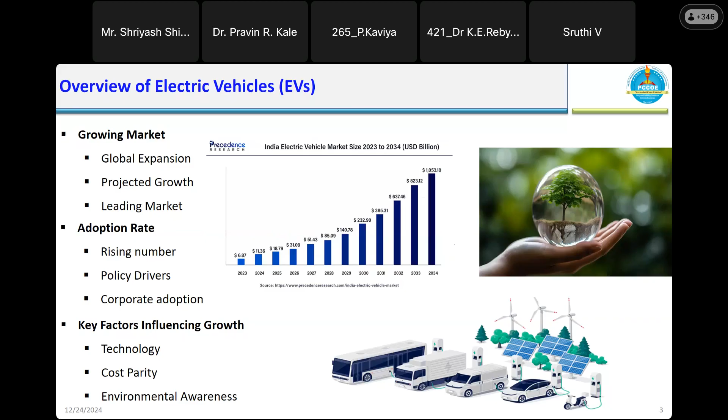Then what are the challenges? Limited charging infrastructure - the infrastructure is still very less. The charging stations are very few, and there is limited charging infrastructure in developing regions also. Then high initial cost is also one of the important parameters. Then raw material sourcing for batteries is also one of the important challenges.

These are the challenges in the electric vehicle. Then, of course, there are opportunities. The opportunities include renewable energy integration with electric vehicle charging networks - you can use solar energy. Then battery recycling and second life applications - battery recycling, where you can recycle the battery and give it a second life. This is also an area where you can work on opportunities.

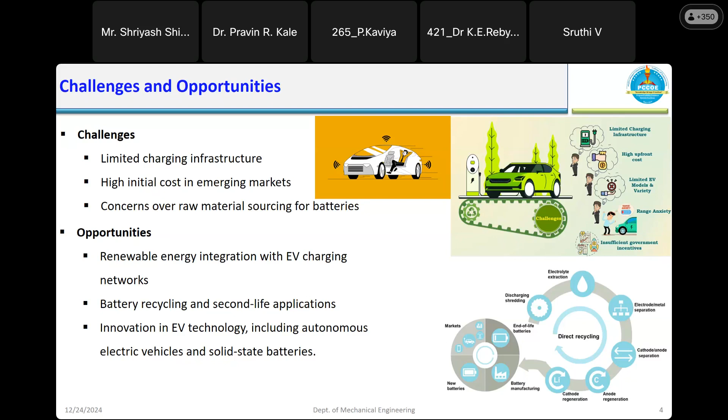Then innovations in electric vehicle technology. Here it is always open - the technology is always open, which includes autonomous electric vehicles and solid state batteries. Now solid state batteries are being introduced. The lithium ion batteries are being replaced by these solid state batteries.

Now, before going further, in overview, what are the different electric vehicles? One is the purely electric vehicle, battery electric vehicle, also known as all-electric vehicle. It is purely electric, entirely on a battery powered electric drivetrain. A large battery pack plugging into the electricity grid is required. The battery pack provides power to one or more electric motors - you can use one motor for front wheel drive or two motors for both front and rear, depending on what you are using. Even four wheel drive is possible.

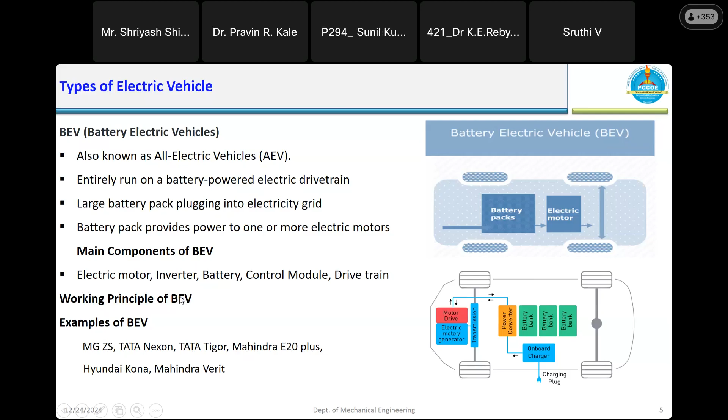Then the main components are: of course the electric motor is there, which is a very important component. Then inverter, AC/DC converter, battery, and control module - since you're using a battery, everything is electronics and it's easily possible. The control units, electronic control units are there. Then the drivetrain - the drivetrain is the main focus area for this particular session. Then the working principle, and these are different examples.

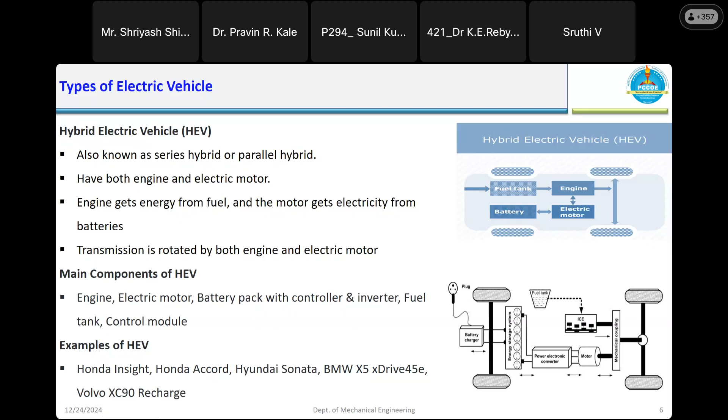Then the hybrid electric vehicle. Second is the hybrid electric vehicle, in which you can use both the conventional IC engine and the electric motor. In a hybrid electric vehicle, this electric motor is essential along with the engine. Gasoline or any type of fuel can be used. That is the hybrid electric vehicle. The engine gets energized from fuel and the motor gets electricity from the batteries. The main components of this hybrid electric vehicle are: engine, electric motor, battery pack with controllers, inverter, fuel tank, and the control module. Control unit module is everywhere. These are examples of hybrid electric vehicles.

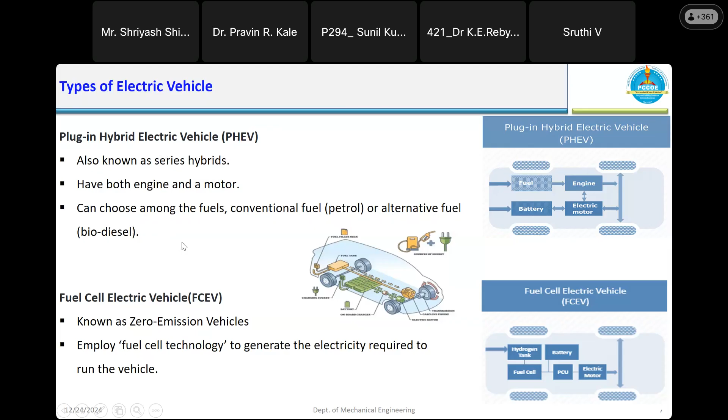Then plug-in hybrid electric vehicle, now also known as a series hybrid. It particularly is a series hybrid and has both engine and motor. Again, it has both, but most of the time the vehicle runs by electric motor, and therefore this plug-in hybrid electric vehicle is used. You can choose among fuels - conventional fuel like petrol, or alternative fuel. Biodiesel is also applicable or used for this plug-in.

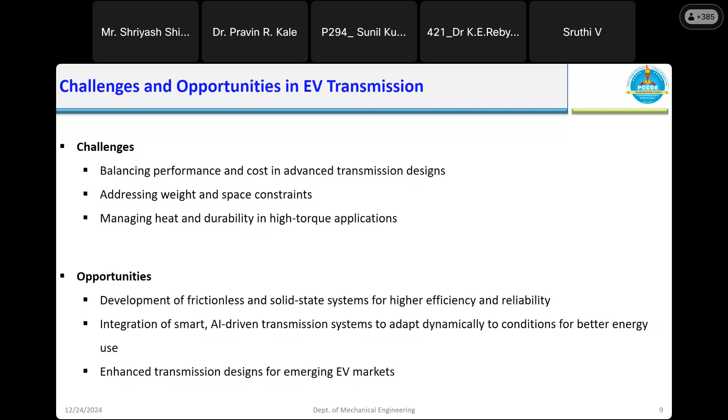Then integration of smart and AI driven transmission systems. The transmission system is now driven by AI, or there is integration of smart transmission systems. That is also important. Then enhanced transmission design for the emerging EV market. So these are the opportunities where you can work.

Now, what is a transmission system? A transmission system is a crucial component of the drivetrain, responsible for transferring power from engine or motor to wheels. You have to transmit the power from engine to motor, or electric motor to wheel.

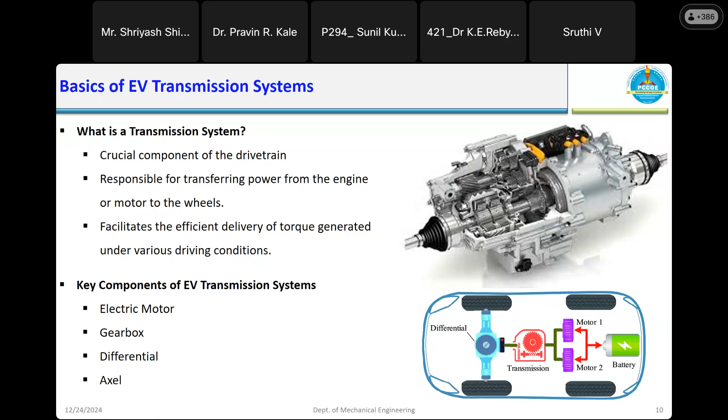So this is the transmission system. You require the transmission system, which consists of different gears. These are the different parts: electric motor is one of the components of the transmission unit, then gearbox, differential, and axle. So these are the different components of transmission system.

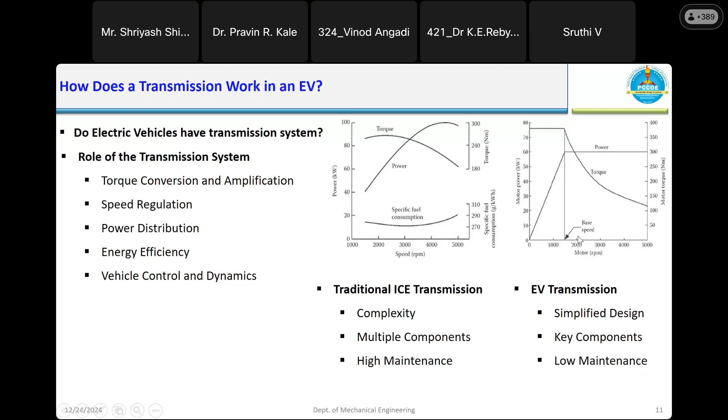Now this is the basic difference: power source is internal combustion engine versus electric motor. For gears, a multi-speed gearbox with typically 5 to 10 speeds is used for IC engines, whereas a single speed gearbox is sufficient for EVs, or in some cases a 2-speed gearbox. Up to today, maximum 2-speed multi-speed gearbox is used in electric vehicle transmission systems, but normally in most cases it is a single speed gearbox.

Then torque delivery requires gears to amplify torque at low RPM in IC engines, so this is essential there. In case of electric motor, there is instant torque, so you can suddenly increase the speed of the vehicle and accelerate easily, reducing the need for a gearbox.

Then a clutch or torque converter is used to disengage the engine, because you require engagement and disengagement, so you have to use a clutch for idling and gear shifting. But in case of EVs, this is not required due to the linear power delivery of the electric motor.

Then the shifting mechanism is manual or automatic in IC engines, whereas it is automatic and seamless in case of electric vehicles.

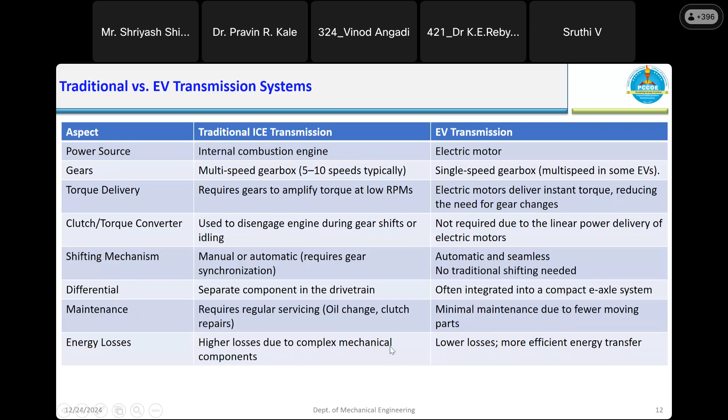For maintenance, this requires regular servicing and clutch repairing, but maintenance is comparatively less because there are no moving parts or lesser moving parts. As for energy losses, there are higher losses due to complex mechanical components, so efficiency is lower.

Now these are the functional advantages of the EV transmission system. First, efficiency: higher efficiency as it eliminates energy losses. Then performance: instant torque from the electric motor provides smooth acceleration without the need for gear shifts, so performance is also important. Then compactness: reduced space and weight compared to bulky transmission systems in IC engine vehicles. And durability: less wear and longer lasting components.

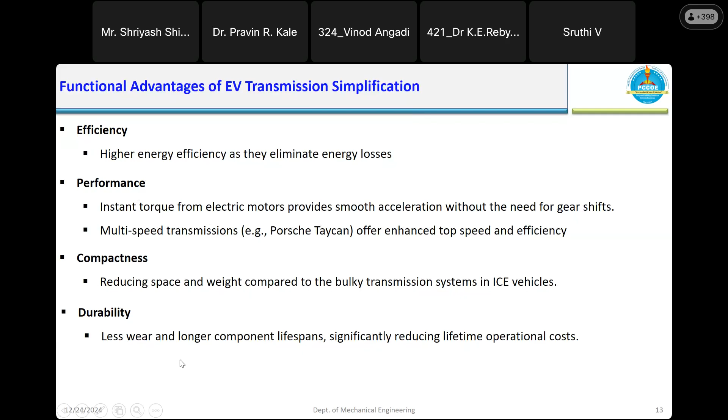Now, different types of electric vehicle transmission systems, particularly single speed. In single speed...

Am I audible now? Is it clear now? Yes sir, yes sir, you're audible.

Now, this is single speed transmission, the most common transmission in electric vehicles, which is commonly used, with only one reduction ratio. Normally it is 2, 3, 4, 5, 6 maximum, so less than 6. Then it relies on the unique characteristics of the electric motor.

This is the key feature, the unique characteristics of the electric motor. It is ideal for most driving scenarios due to the broad torque range of electric motors. In most cases, this single speed transmission system is used, and most EVs feature a single speed reduction gear, simplifying the drivetrain and reducing maintenance needs.

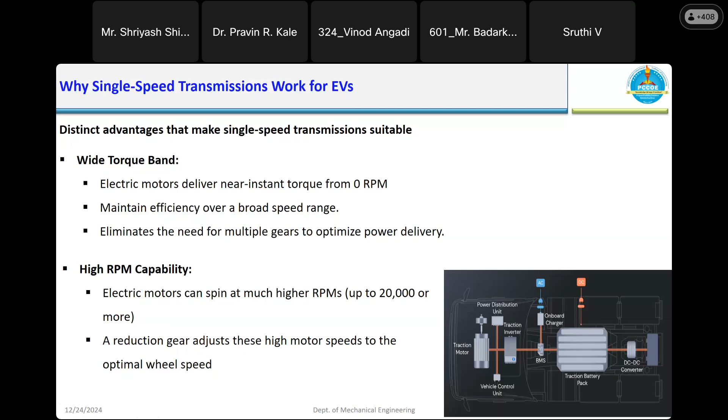Then simplicity of single speed transmission: fewer components, no clutch, torque converter or complex parts. Reduced complexity leads to fewer points of failure. This simplicity reduces complexity, cost and weight, with fewer components resulting in a simple design.

Then compact design: single speed systems are often integrated with the electric motor and differential into a single unit, which I will cover in the case study. This reduces the overall size and weight of the drivetrain. Reliability, because of fewer moving parts, results in a longer lifespan and lower maintenance requirements.

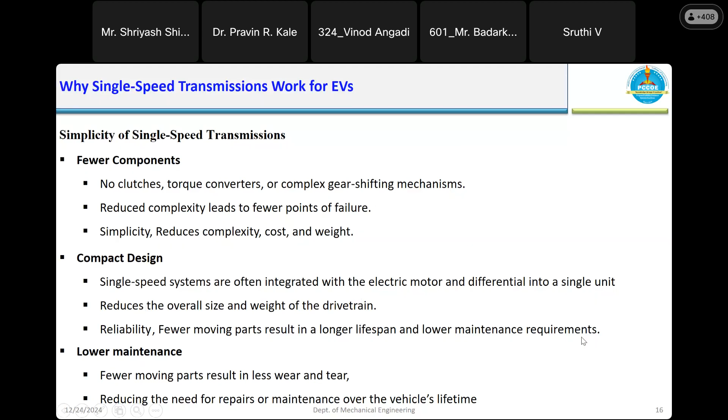Then efficiency of single speed transmission: energy loss reduction through streamlined power delivery, which is very important and improves the range.

Then limitations of single speed transmission: it has high speed efficiency limits and is not suitable for heavy duty applications. You cannot use it for trucks or tractors, so it is not used in very high duty, heavy duty applications. So these are the examples of single speed transmission.

Multi-speed transmission improves potential for enhanced performance, offering advantages in efficiency and adaptability. There are challenges in implementation; it is very difficult to use, but the maximum you can use is up to 2-stage or 2-speed multi-speed transmission system.

Performance benefits include improved efficiency through optimal motor operation. Electric motors are most efficient within a specific range, so multi-speed transmission allows the motor to stay within this range, enhancing optimal power.

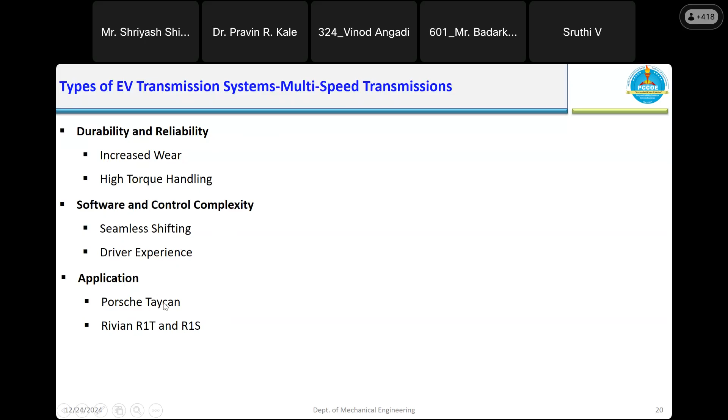Applications include the Porsche Taycan. Then there's the direct drive system: here, the engine or motor is connected directly to the axle or wheel, without a gear drive or any transmission system, transmitting power directly to the wheels.

The motor directly drives the output shaft, eliminating the need for a gearbox. You can remove the clutch and other complex transmission mechanisms. This is rarely found in electric vehicles, but it's commonly found in wind turbines and industrial machinery.

The benefits of a direct drive system are simplified design, improved efficiency, and reduced noise and vibration due to fewer components. It's also compact and lightweight, with low maintenance cost and enhanced performance.

Limitations of the direct drive system include high cost, since advanced materials and manufacturing techniques are required, which increases cost.

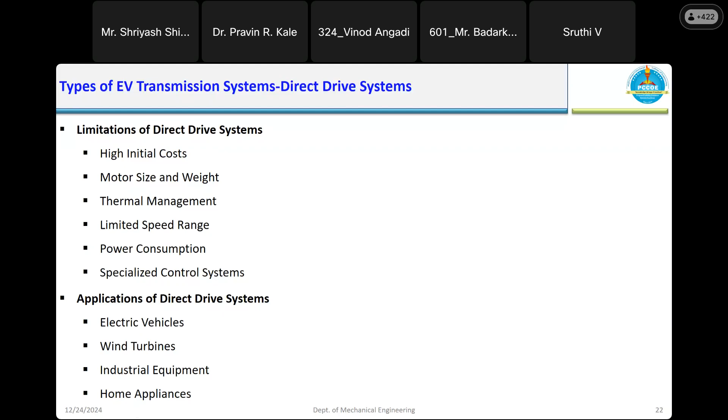And therefore power consumption requires a more specialized control system, because you are directly driving the system or wheel axle. So these are the advantages and limitations of the direct drive system. Applications in electric vehicles are rare but it is commonly used in wind turbines, industrial equipment, and home appliances, especially washing machines.

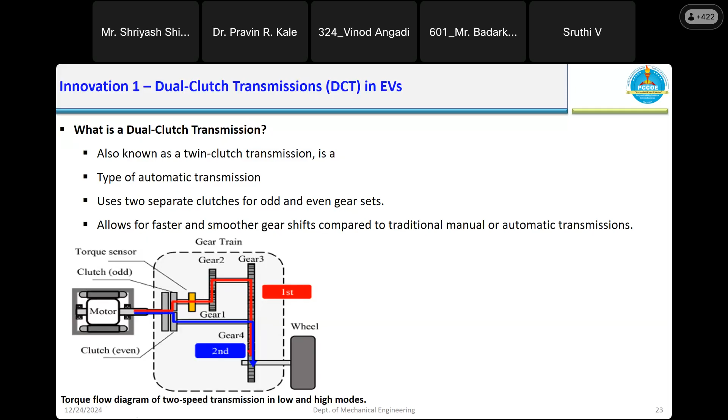The next innovation is the dual clutch transmission, also called twin clutch transmission. It is a type of automatic transmission that uses two separate clutches for odd and even gear sets, allowing faster and smoother gear shifts compared to traditional manual transmission. Here I have shown the torque flow diagram where the two clutch systems can be used. This is also one of the important areas where you can work.

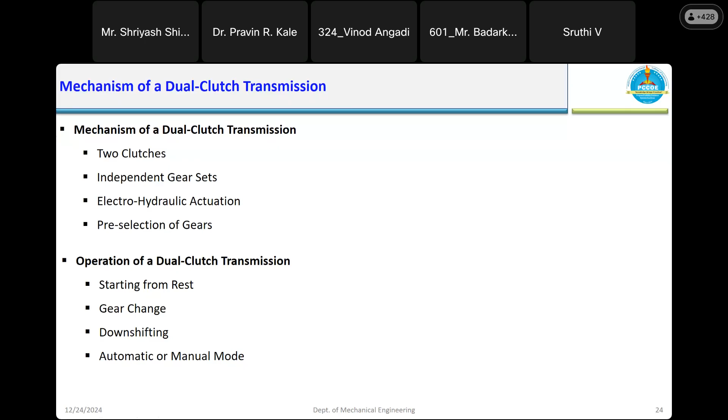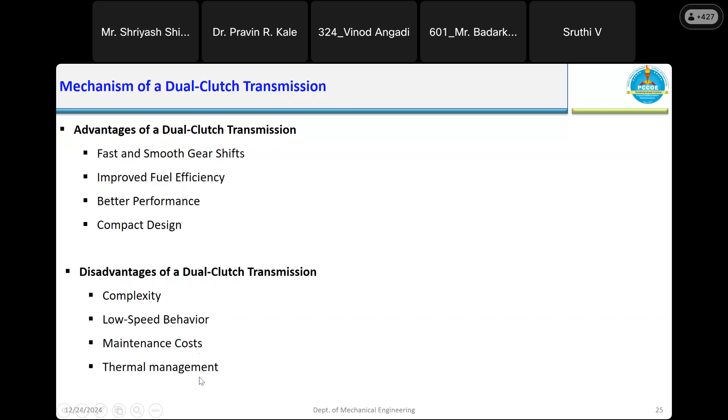Advantages include fast and smooth gear shifts, because there is no time lag or jerks. Fuel efficiency is improved, along with better performance and compact design. The disadvantages of dual clutch transmission are complexity, because there are two clutches to handle, low speed behavior issues, higher maintenance cost, and the need for more thermal management.

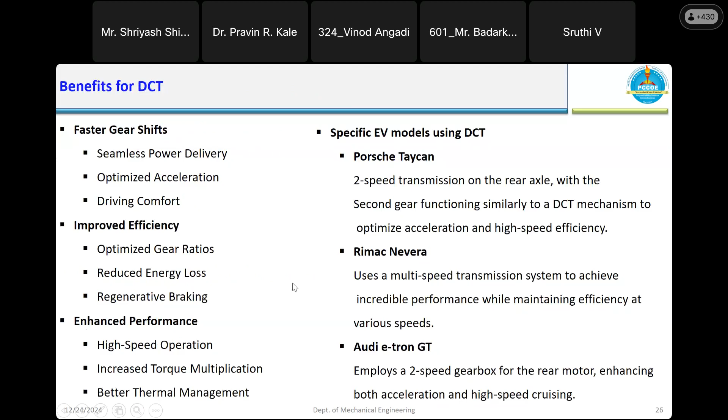The benefits are faster gear shifts, improved efficiency, and enhanced performance. Performance is also increased. These are the applications of electric vehicle models using DCT.

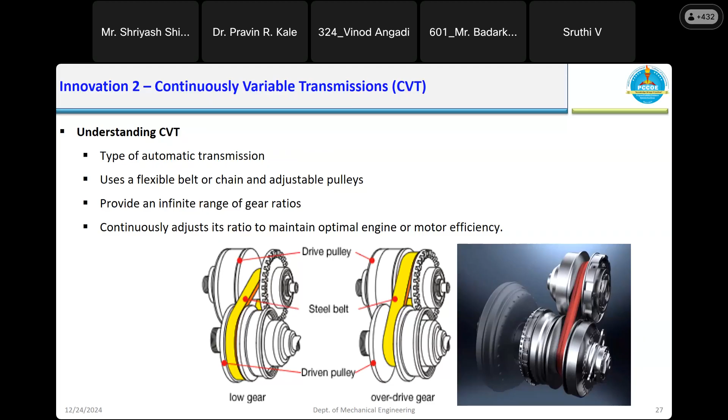CVT provides an infinite range, which is the main advantage. It continuously adjusts its ratio to maintain optimal engine or motor efficiency, and optimal performance can be obtained using this continuously variable transmission. It provides an infinite number of gear ratios within its range, allowing smooth and optimal performance.

The mechanical design uses a belt or chain between two adjustable conical pulleys, altering their diameters to change the gear ratio. Shifting of gears is not required, providing a seamless driving experience. It continuously adjusts to maintain the most efficient ratio, providing fuel or energy efficiency.

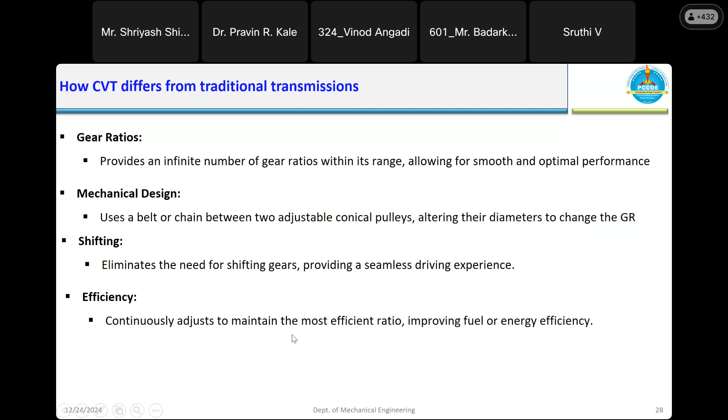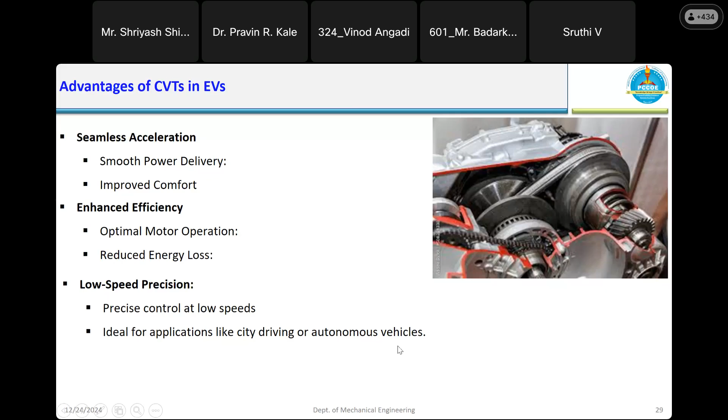The future aspects include material advancement, which is very important because of the development of more desirable, durable and efficient materials for belts and chains. This is an area where you can work.

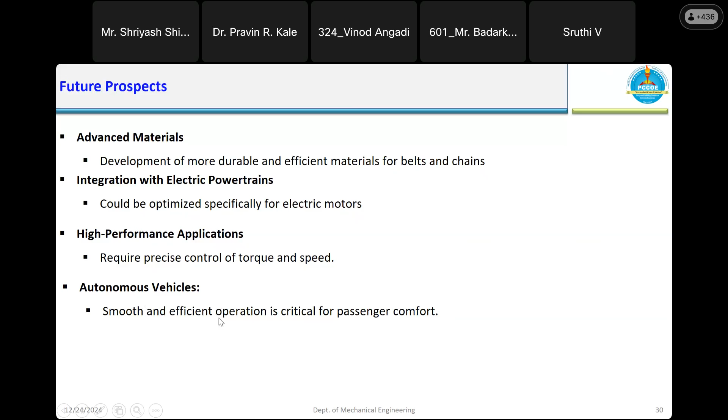Then integration with electric powertrain. Integration means you have to integrate all the elements or components. High performance applications require precise control of torque and speed, and autonomous vehicles require smooth and efficient operation.

Then integrated transmission and drivetrain system. What is the concept of integrated transmission and drivetrain system? It is combining transmissions with other drivetrain components, that means electric motors, inverters and differentials are combined into a single compact unit, making it an integrated transmission and drivetrain system.

So all components are combined in a single unit, including the axle and the wheels, and therefore the total space is reduced and the weight is also comparatively less, but it is a complicated design requiring electronics, controllers, etc.

This will simplify the drivetrain architecture, enhance performance and improve efficiency. This is an important area where you can work, combining transmission with other drivetrain components like the transmission system and electric motor.

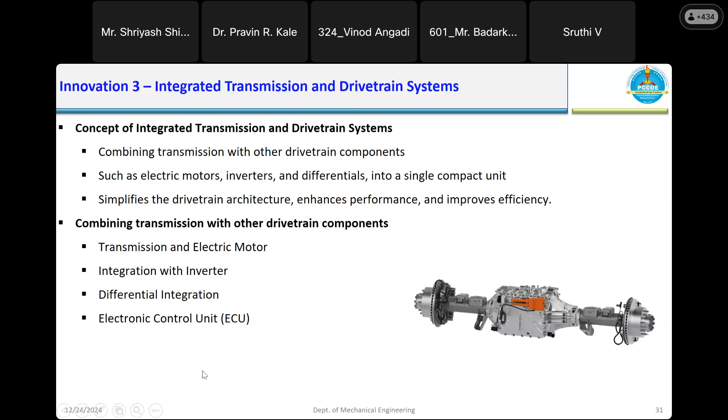What is the integration part, or what is the combination? Differential integration, electronic control unit - these are the different components that you have to combine in a single unit. Now the weight is reduced, there are fewer components, compact design, simplified manufacturing, and improved energy efficiency.

Energy efficiency is improved and therefore there is reduced energy loss, optimized operation, and improved thermal management due to fewer components. Then enhanced performance, seamless power delivery, and faster response time, with very less response time.

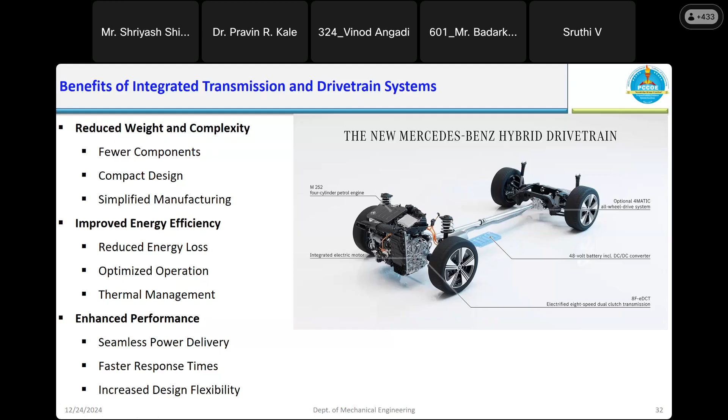Then increased design flexibility. The flexibility is there.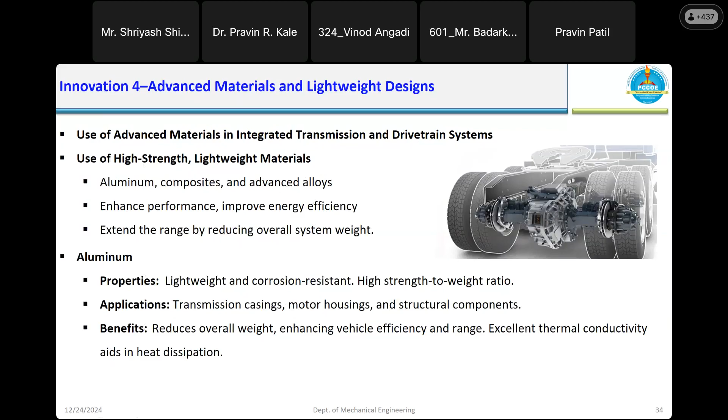Then aluminum properties, application, benefits - this is related to the material. Composite materials are also used. You have to study the properties: ultralight with excellent mechanical strength, and superior fatigue resistance. This is the composite.

The application is structural reinforcement, enclosures, and non-load bearing components. The benefit is reduced weight without compromising strength, and it enables complex shapes for better aerodynamic and structural design.

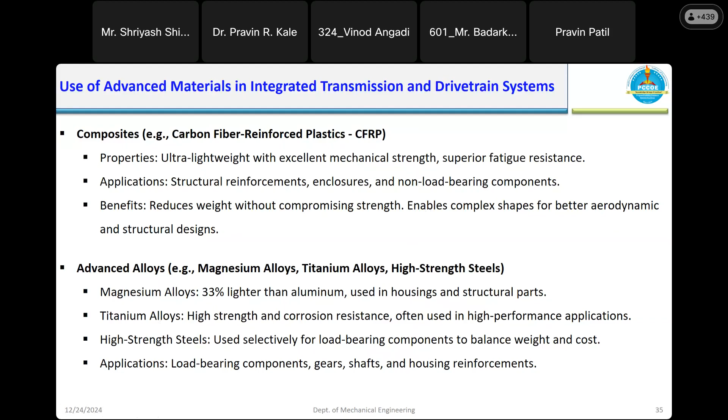These are advanced alloys: magnesium alloy, titanium alloy, high strength steel. These have particular applications like load bearing components, gears, shafts. You can use these materials, study the behavior of the material, and according to that, improve and increase the properties of the material.

These are again different materials: graphene-enhanced composites, with potential for ultra lightweight material. Then additive manufacturing is also important, enabling the creation of intricate lightweight components using titanium and other advanced materials.

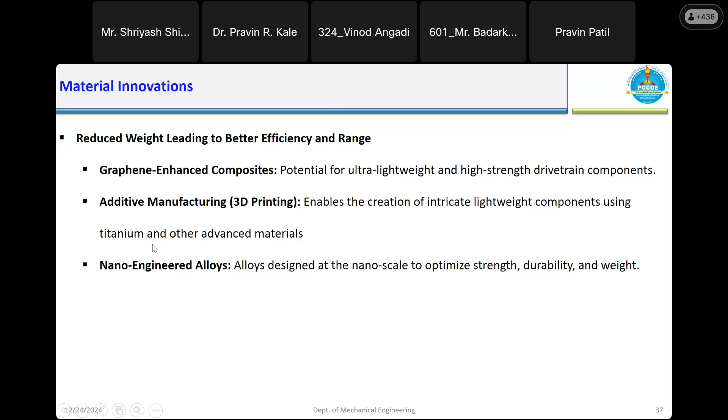Role of electronics and software. This is also an important parameter because in a smart control system, you require controllers - electronic controllers, different controllers are required. As I mentioned, object detection or lane detection, finding a blind spot requires different controllers and sensors, and therefore this is also an important area where you can work on designing control strategies for particular components.

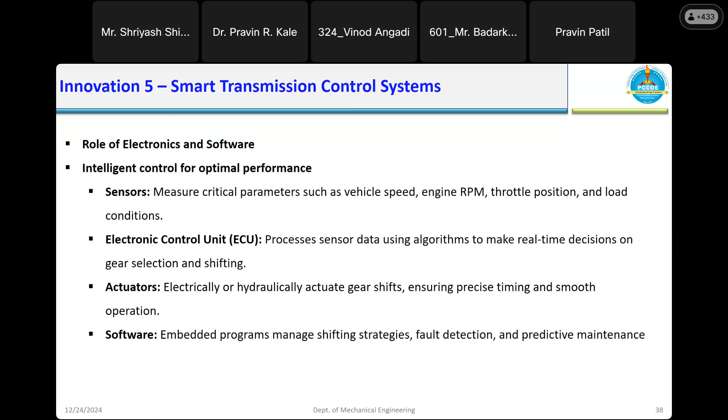Then there are adaptive shifting strategies - customized shifting behavior that adapts based on driving modes, load sensing, and driver behavior recognition. Then real-time monitoring, continuous monitoring of the vehicle, monitoring engine performance and torque demand, that you can continuously operate.

Instant correction. According to that, you have to take the necessary correction action, so for that you require corrections and controllers. According to that, you have to design the strategy.

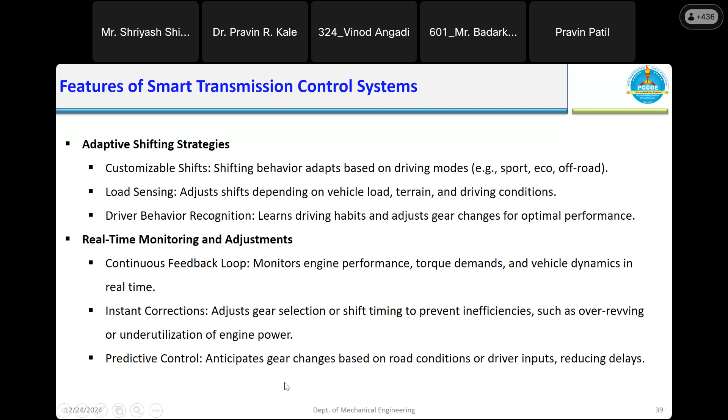Enhanced driving experience: smoother shifts, precision control shift, reduced jerks, and improved ride comfort. The ride comfort is improved when jerks are reduced, then automatically your ride will improve.

Customizable modes: drivers can choose driving modes tailored to their preferences or specific situations. Improved responsiveness: faster and more accurate gear changes, enhanced acceleration, and overall driving dynamics.

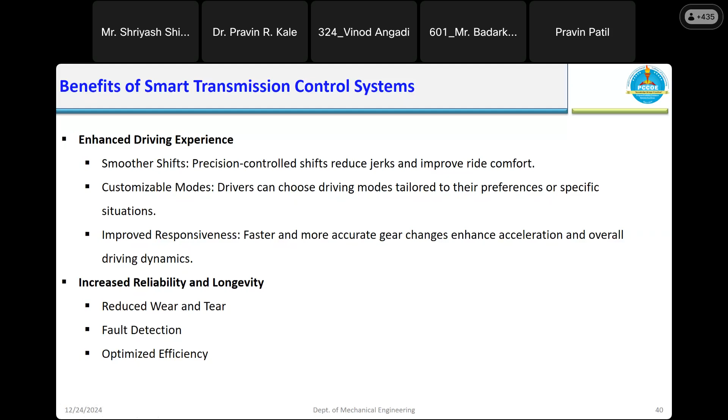Increased reliability and longevity: reduced wear and tear, fault detection, optimization. This is intelligent control for optimal performance, all AI driven controllers, then full vehicle integration, enhanced diagnostics.

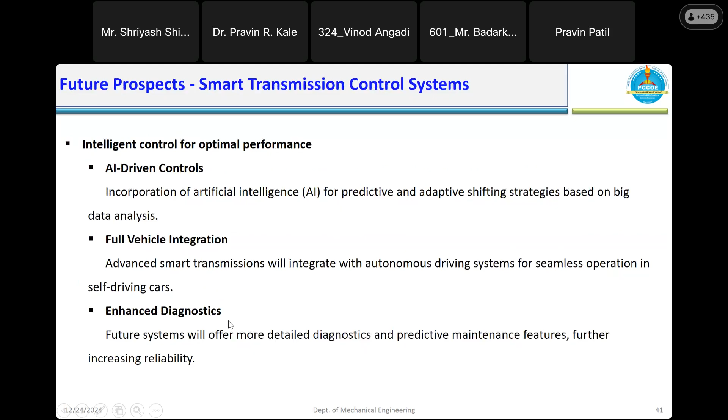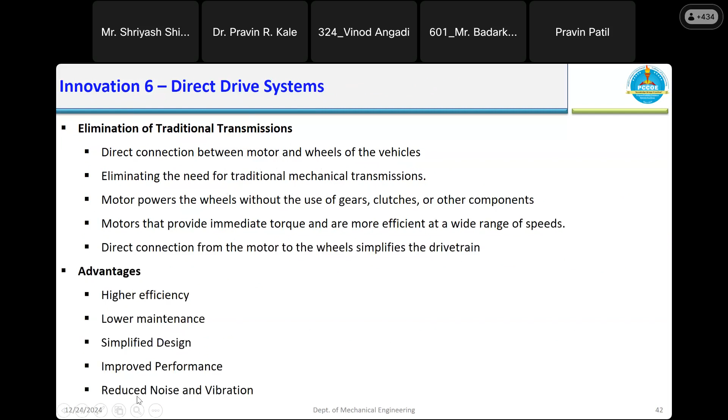Then elimination of traditional transmissions, as we have seen in the direct drive system, meaning you can install a motor directly on the wheel, eliminating the need for traditional transmission. These are the advantages of this drive system, increasing efficiency and performance enhancement.

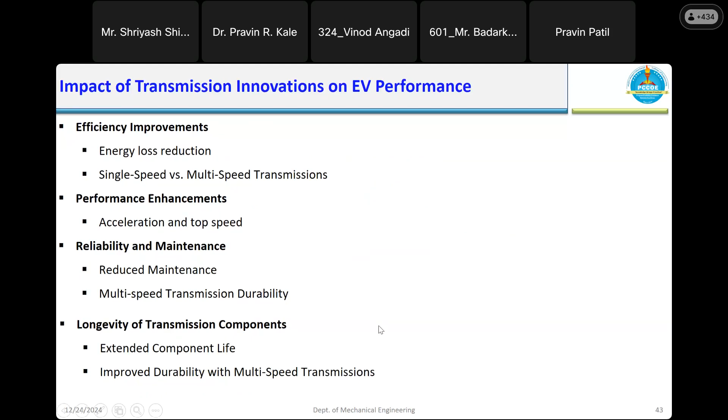These are the different improving parameters. Now I will take one case study. One of my colleagues, Dr. Shweta Patil, is doing her PhD on the topic of modular development of a conventional vehicle.

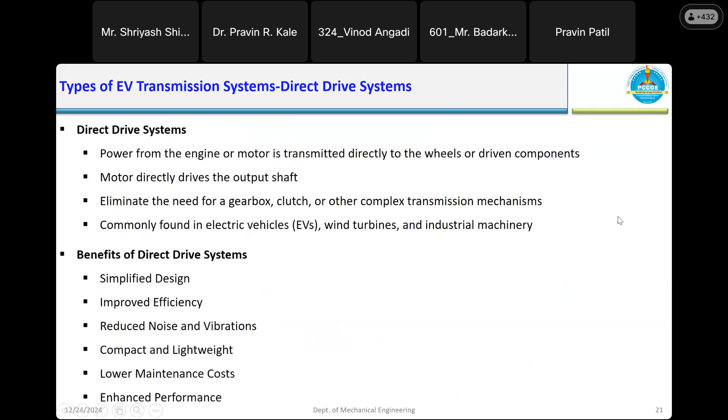The topic is the modular development of a conventional vehicle into an electric vehicle. Whatever is the conventional vehicle, that is a Maruti Zen car, she has converted into an electric vehicle using a single speed transmission, replacing the conventional engine with a single speed setup.

The parameters are to evaluate the performance of a retrofitted electric vehicle, that is the Maruti Zen car, a conventional petrol car. It is a forward wheel drive, with the engine on the front wheel with a manual 5-speed transmission.

It is a 5-speed gearbox, which she replaced with a single speed gearbox, then tested the vehicle to determine what changes or improvements in vehicle performance she could conclude.

So these are the design parameters. The overall length of the car is already mentioned; these are the fixed parameters, including ground clearance, gross weight, and top speed of 60 kilometers per hour.

She has taken 60 kilometers per hour. Normally the actual car's top speed is 95, but because of some constraints, and since the vehicle is normally used as an intercity vehicle, this Zen car is used for intercity travel, she has taken 60 kilometers per hour as the top speed.

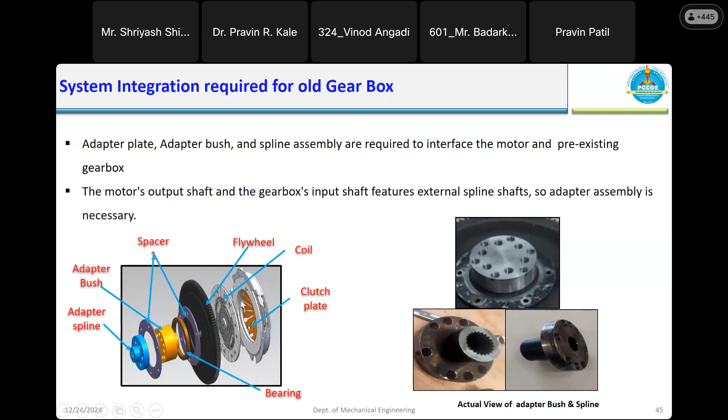Then system integration can be replaced by a single coupler. Initially, this coupler system is required in an actual IC engine or the 5-speed gearbox - this type of connection is required. But now it is simple; the system integration can be simplified using a single coupler.

Single speed transmission is adopted by many electric vehicles now, because it is commonly used. Therefore, she has used the single speed transmission.

Now, what are the outcomes? The outcome of this work is the development of a single speed transmission system. She has developed and designed the single speed gearbox with helical gears, following all the design procedures.

What are the different steps or behavior of the material? She considered failures, the wearing, and determined the beam strength to design this single speed gearbox. It is a simple system - weight is drastically reduced, almost 18 or 19 kg, and therefore the performance is increased.

Now, feasibility of this study regarding the old gearbox system constraints: the perfect alignment with motor and gearbox is essential, as I have already told - the motor and gearbox should be perfectly aligned.

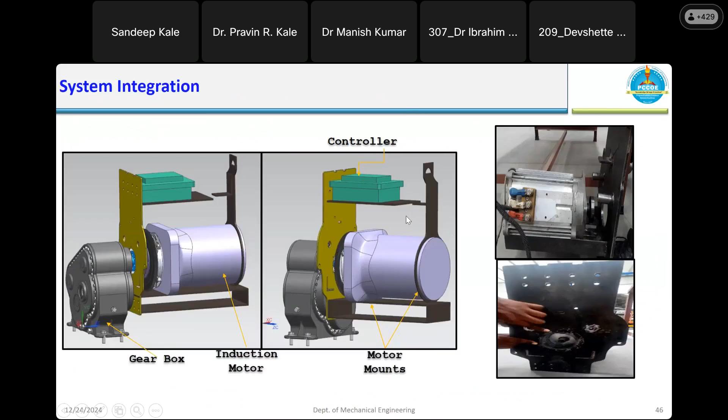Not only on-road vehicles, but because it is heavy, you can also use it in off-road vehicles with a single speed gearbox, but with a high motor specification.

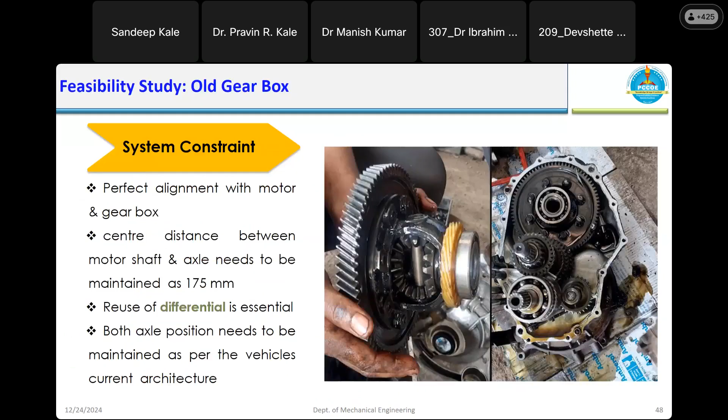Okay, so it will also depend on two-wheel drive or four-wheel drive. Yes, whether two-wheel drive or four-wheel drive is used. In the case of four-wheel drive, I think in some cases it is direct drive - there is no gear required, it is directly controlled by the motor.

Okay, thank you sir. Sir, please share the slide with us, sir, because the study slide has been shown to us, sir. Okay.

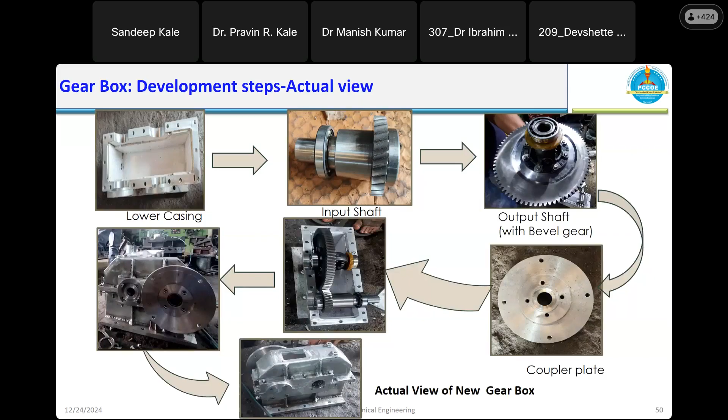Sir, good evening sir. Yes sir. Okay, sir, we'll take one more slide question, number 44, sir.

Slide number 44 - you were talking about these design parameters, are they existing car parameters or new parameters, sir? Existing parameter, yes existing. That means the old car, the same car is same, only the gearbox is changed.

Sir, and the parameters you were talking about, all these converter parameters, are they all the same? Yeah, old same parameters only, the same car we have used. Okay, but only the gearbox is different - the gearbox is a single speed gearbox, instead of a 5-speed gearbox, now it is single speed gearbox.

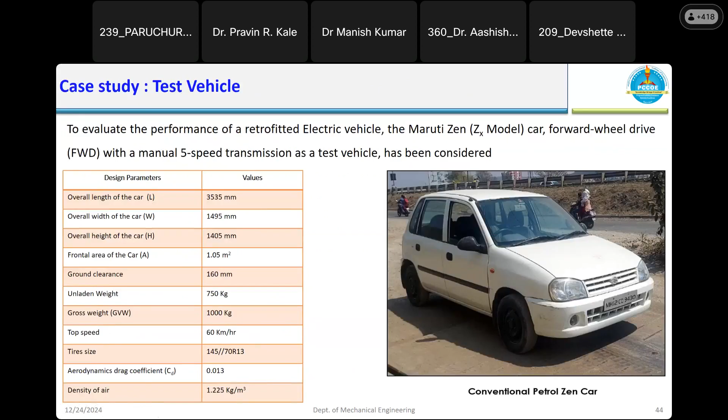Sir, and regarding the converter, sir, then the last slide - maybe the last slide you're talking about existing, and also the last slide. I think last one.

Here sir, what type of converter are you using? Converter - yes, this is the essential part actually. Which type exactly I don't know. So madam, please can you tell me the exact converter specification? Hello, am I audible sir?

Yes madam, this is a buck converter. Actually the battery voltage is 72 volt, and that battery is a primary battery, and a secondary battery is required for the auxiliary purpose, so that voltage is 12 volt. That's why a buck converter is used for this case particularly, which will decrease the voltage from 72 volt to 12 volt.

So are you talking about the existing one or the proposed one, madam? Actual one - but is this converter related to old or new? Sir, this converter is the buck converter, not a boost converter. The buck converter - yeah, that only madam. Either existing one you're talking about, or new? No, it is new. These all parts are new - controller, converter, motor, battery, these are new. What is old? Only the 12-volt battery is old in this particular case. Then safety knot, relay box, vacuum pump, everything is new, we have installed that.